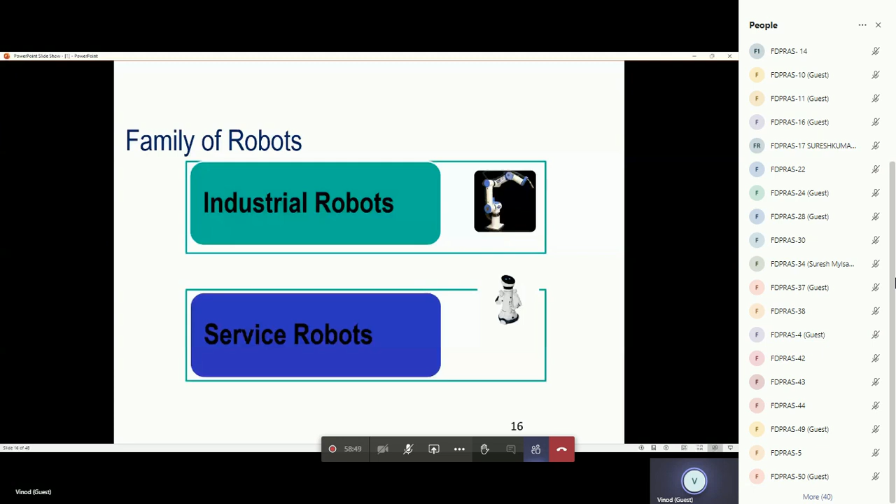And coming to the service robots, we have robots for surgery, robots for underwater applications, robots for space, robots for unmanned aerial vehicles, robots for assisting humans, robots for taking care of patients, robots for navigation, robots for entertainment, robots for teaching. So in various applications now robots have come. There were small groups, so that is why they were all clubbed together and we called them service robots.

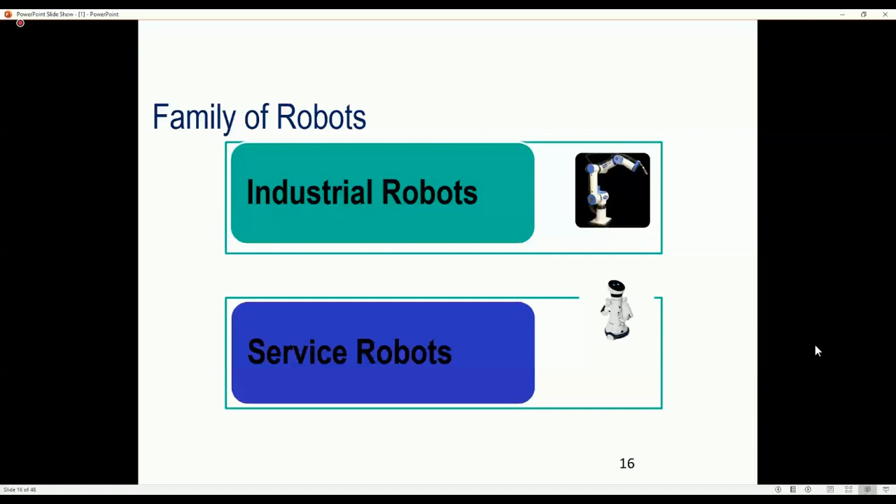Whereas industrial robots, it is more saturated right now. There are standard configurations, and all the robots fall in this group of industrial standards. But service robots are huge, from humanoids to small mobile platforms. The market as well as everything is huge. So there's a wide spectrum.

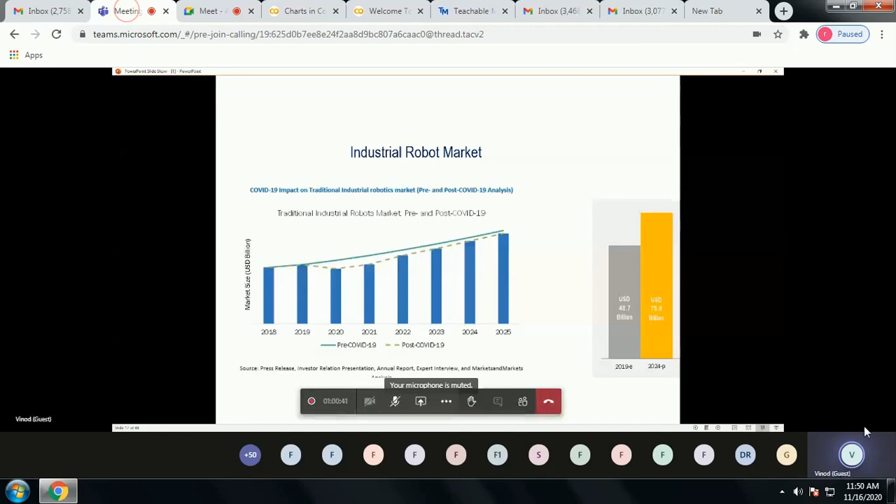And if you see the growth of industrial robots, I'm showing from 2018 to 2025 with some expected volumes. Because of COVID, there is a small dip, but apart from that, in the post-COVID scenario, the demand is going to be high. 48.7 billion US dollars was the worth of this industry in 2019. And the prediction is that by 2024, we will have about 75.6 billion US dollars. That is going to be the market for industrial robots. So that's a big market.

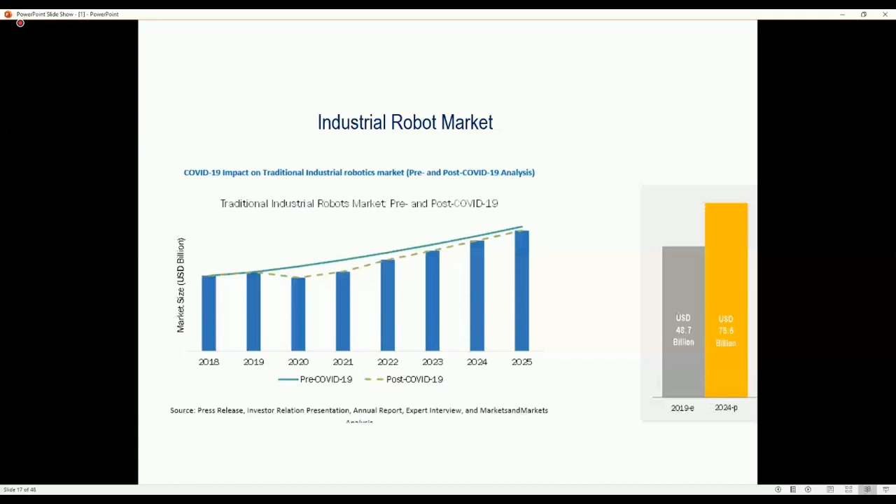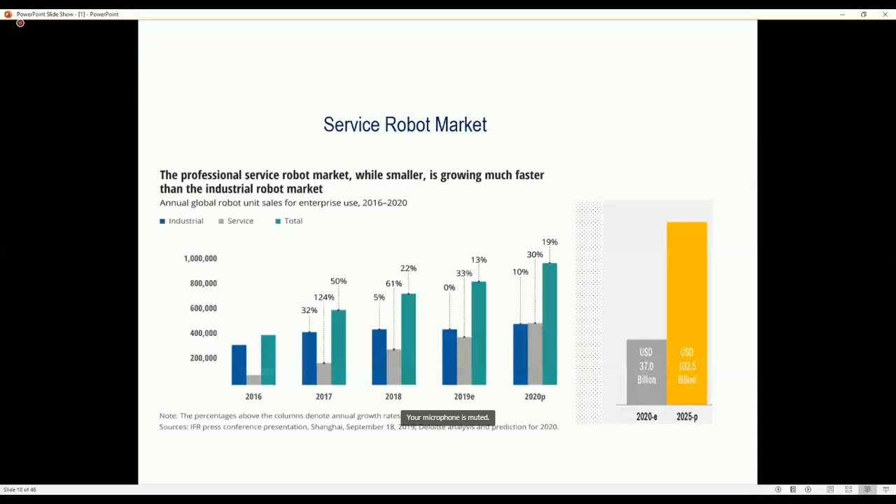Now, our topic today is about the configurations or the architecture of industrial robots. At the end of this FDP, we should have enough knowledge on various types of industrial robots, their configurations, various kinds of end effectors, how to size end effectors, how to design end effectors, how to customize end effectors, how to integrate a robot and an end effector, and also how to integrate robots into a shop floor, with some examples on programming these robots. And that is for the first week.

Second week, we will have the autonomous systems. That talks more about the service industry or service robots. So the first week will be more concentrated on industrial robots, and the second week will be more focused on service robots. And when it comes to service robots, navigation is very important, so it is mostly about mobile platforms and AMRs. We have excellent speakers for all these sessions.

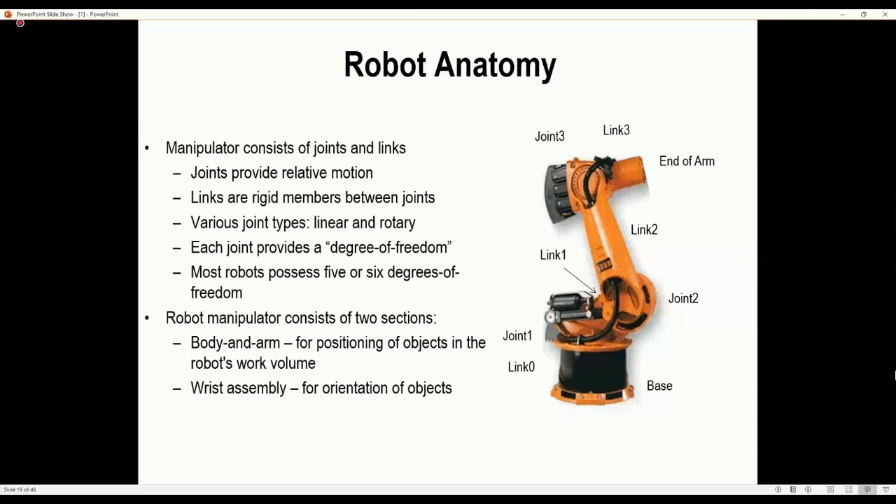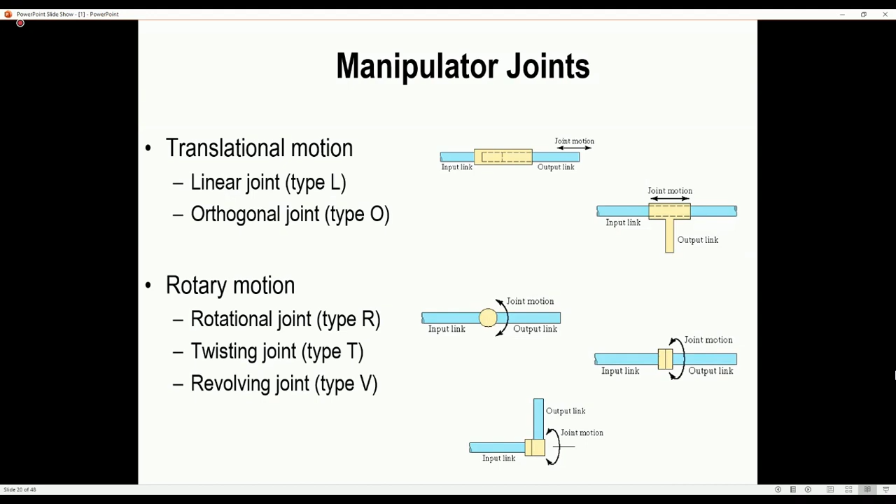So the joint notation scheme is L, O, R, T and V. Normally it separates the body and arm assembly from the wrist assembly using a colon. If there is a body and arm assembly, a colon should be used to separate or tell us that one forms a part of the body and the other forms a part of the wrist assembly.

Example TLR: T for twisting, L for linear, R for rotational. So using TLR or LORTV, you can just have a look at this picture once again. L is linear, O is orthogonal, R rotational, T twisting, and V is revolving.

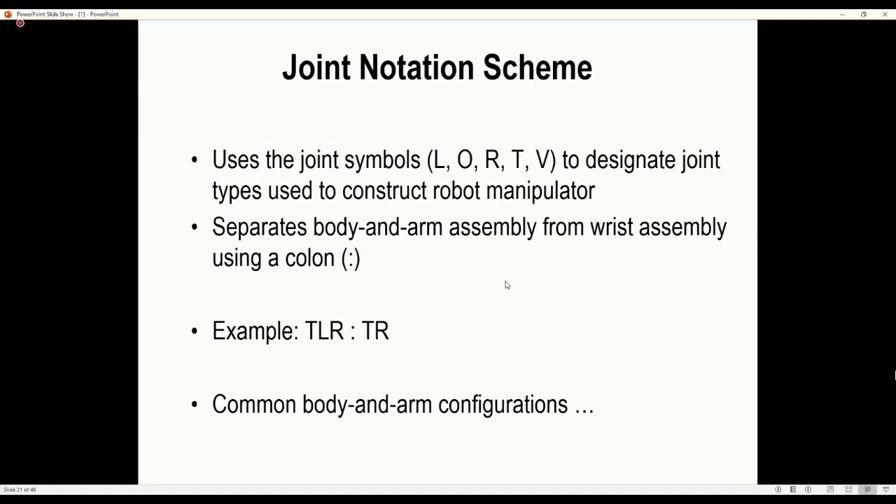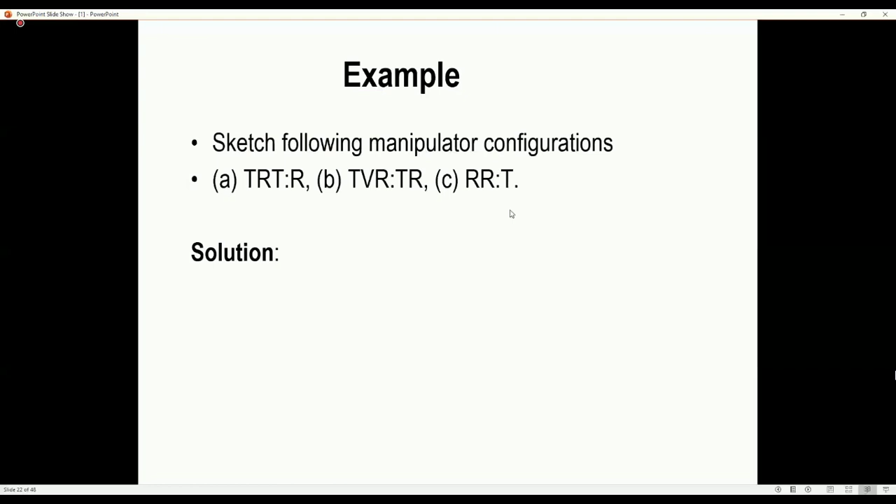So if you are asked to sketch some of the manipulator configurations, will you be able to do this? You can try this later. I'll just show the solution also. TRT:R, then TVR:TR, RR:T. So here you can see the base is fixed to the ground. On top of that there is a joint, that is twisting. So this twists on this.

Then the next joint is R, rotational. Then there is one more twist here. And the next one forms the part of the arm. So that is rotational, so that joint is represented by R. So this will be the sketch or the configuration of a robot with TRT:R.

A TVR: twisting, revolution, then rotational, then there is a twist, then there is another rotation. So that can be sketched like this. RR, there are two rotational joints, and at the end this is a twisting. So the twist forms a part of the robot wrist. So this is how any robot architecture can be represented.

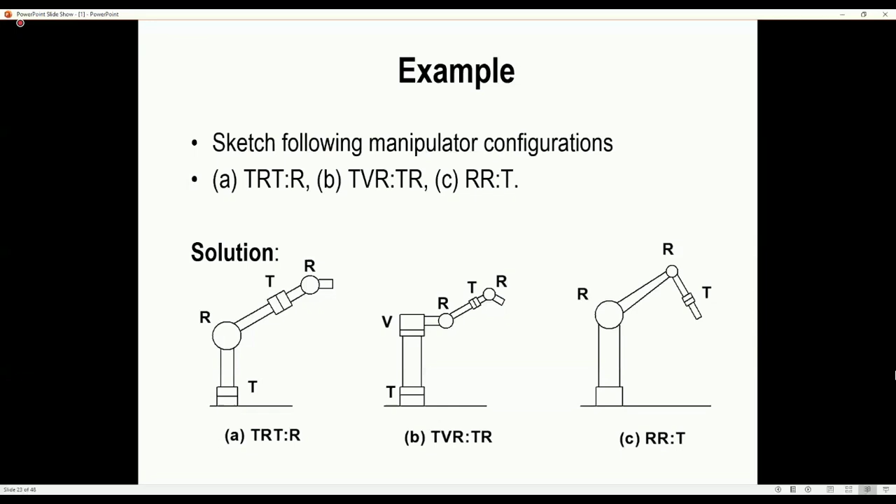So when you go into the design or when you want to understand more about industrial robots, there are some terms we have to be familiar with. What is the working envelope? Not all robots can be used for all purposes. Even if you are asked to select a robot for an application, there are various terms we have to be familiar with. Another is the positioning accuracy of the robot. So first is the work envelope or the work volume. How accurate is your robot?

Then next is the payload, how much weight it can carry. The weight here includes the end effector. So if you are going to have a gripper, the weight of the gripper plus the weight you have to lift, that is called the payload. The number of axes or joints. Then the speed of movement, that is also important.

Sometimes when choosing robots, we have seen several cases of industries making mistakes. Sometimes they may not be able to achieve the production targets because the speed doesn't match the required speed. It finally ends up in a big failure.

Then based on the motion control, it can be path control or velocity control. Then what kind of drive the robot uses? It can be hydraulically driven, or electrically powered, or a pure pneumatic robot. So all versions are available in the industry.

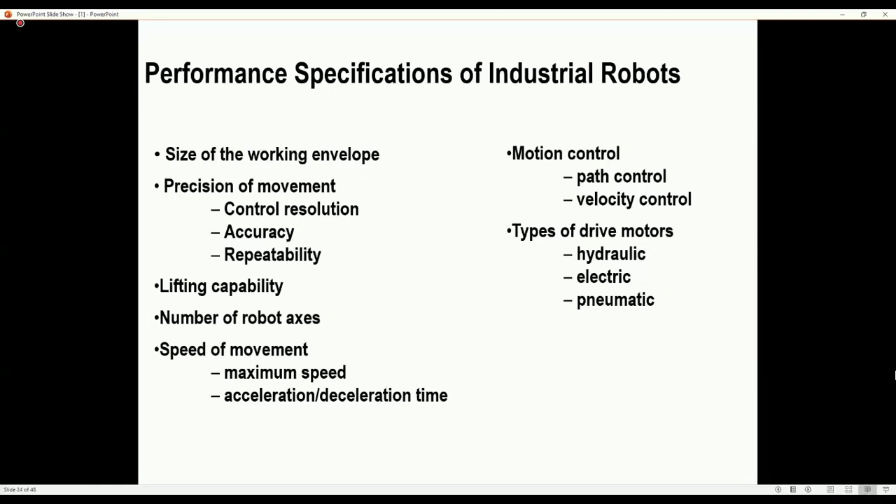And here the work volume, you can see a picture that shows what we mean by work volume. Normal industrial robots are fixed either to the ground or on a table or closer to a machine. So with the base fixed, how much can the robot reach? The spatial region within which the end of the robot's wrist can be manipulated is called the work volume or the workspace. This is determined by the physical configuration of the robot.

There are 6 physical configurations. We will see that in detail. The size, the number of axes, robot mounting position, limits of arm and joints. And then at the end, we are also fitting an end effector. So how long is the end effector? How is the reach of the end effector? That also has an effect on the work volume of the industrial robot.

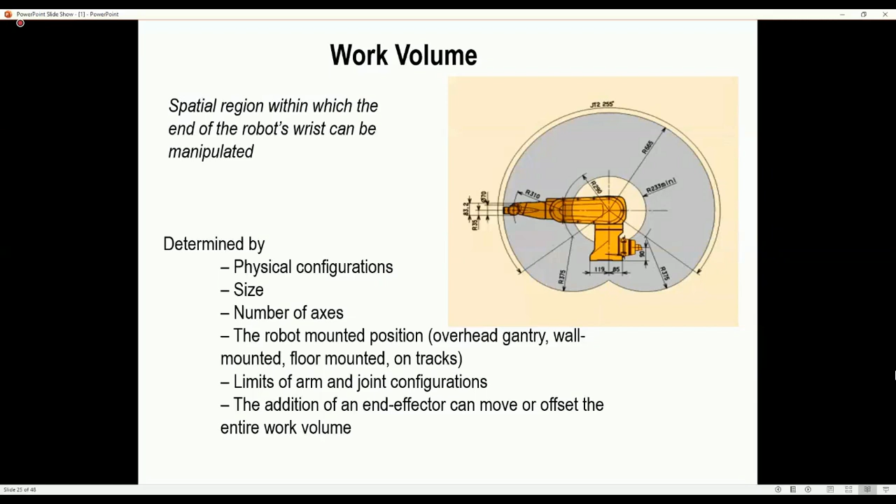Another term is the spatial resolution. So that is the smallest increment of motion at the wrist end that can be controlled by the robot. So this depends upon various factors, like you have a control system to control the positioning accuracy. We use a lot of feedback systems, so the accuracy of the feedback systems, also the mechanical accuracy of the joints, the drives. So all these contribute to the spatial resolution of an industrial robot.

So if you see here, there is a target point. So the accuracy is how far the deviation is from the possible position to the target point, and maybe the second time you can see the adjacent position, another possible position. So the resolution is the smallest increment. Once you give a command, where it will go and stop. Let us say we want to move it by 1 micron.

That is the requirement. When you give a command of 1 micron, the robot is supposed to move 1 micron over in 3-dimensional space, but it need not, because there are no robots with 1 micron resolution or accuracy. Let us say the robot's positioning accuracy is 25 microns. Even within 25 microns, let us say we give a command of 10 microns, it may not go exactly, because its accuracy is 25 microns, so it can be plus 25 or minus 25. So the resolution here is within the 50 micron range.

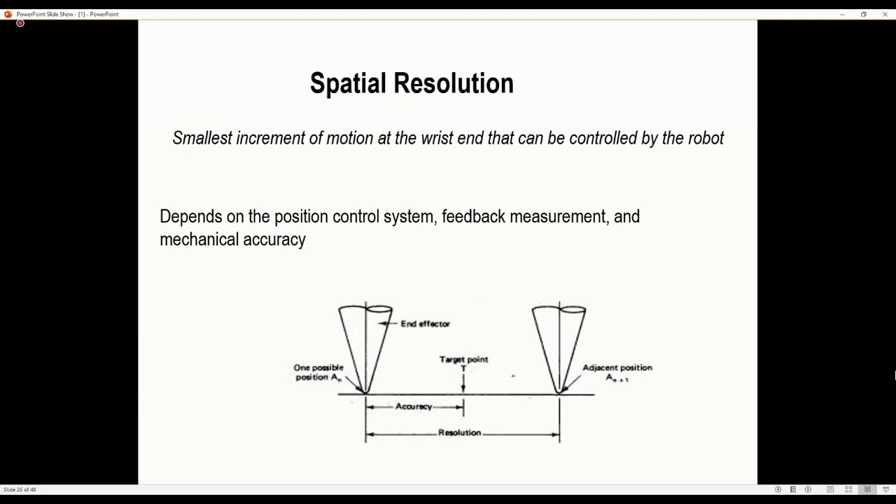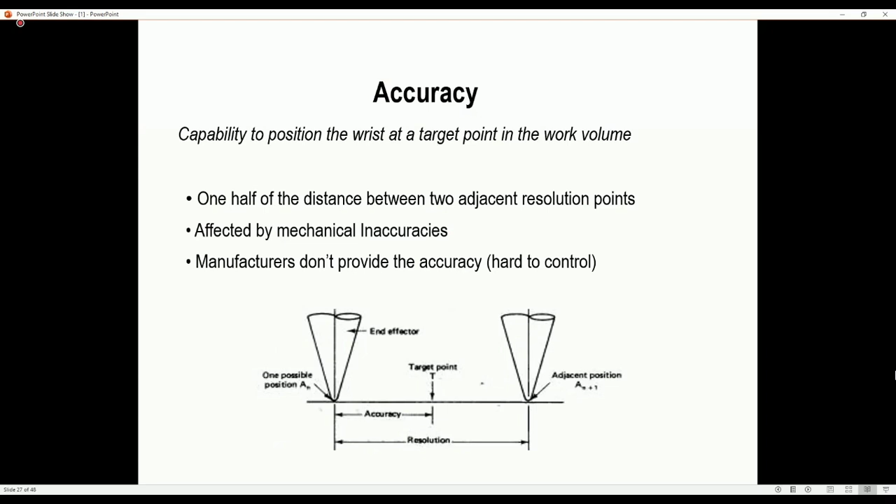And the accuracy is the capability to position the wrist at a target point in the work volume. So that we have seen, that is the accuracy by which, within the spatial resolution of the robot, how accurately we can position the end effector. So that is called the accuracy of the robot.

Another very important term is the repeatability, because the robot may have accuracy but need not be repeatable every time. So when you operate it 100 times, if the robot end effector positions at different points during these 100 iterations, then its repeatability is very poor. So robots are supposed to give very good repeatability, because in most cases we are using them for repetitive tasks. So if repeatability is not there for a repetitive task, that particular robot may not be a good choice.

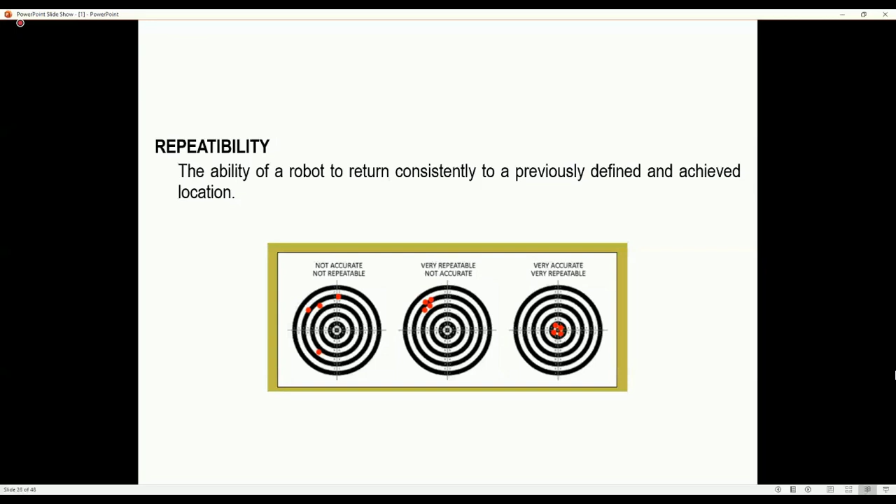So here in the first picture, it is not accurate, it is not repeatable, because you can see the 4 points are spread across. In the second one, repeatability is there because all points are closer, but it is far away from our actual desired or required point. So accuracy is less, but repeatability is good. In the third case, it is accurate. At the same time, repeatability is also good, because all the 4 spots are within its accuracy range. So this is another term which you can find in most of the data sheets of any industrial robot.

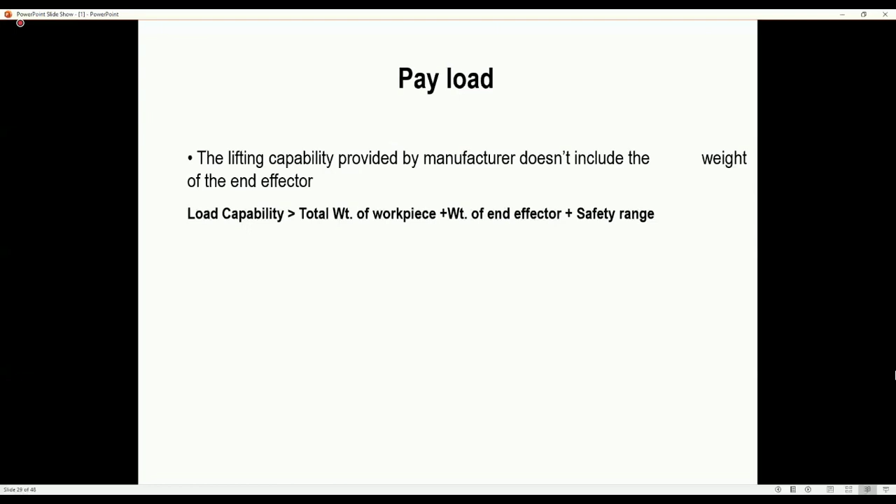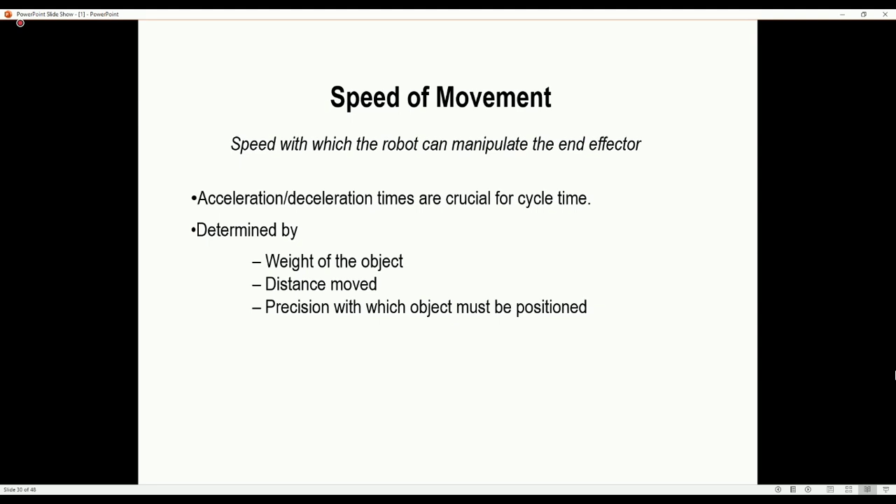And payload, that is the lifting capability provided by the manufacturer, that includes the total workpiece weight plus the weight of the end effector, and we also provide a safety range, normally 80%. Then speed of movement, I think we have to speed up. How fast we have to move the manipulators, because sometimes the accuracy may be good, the repeatability may be good, but the robot inherently may be slow. So when you deploy such robots for some fast action like pick and place or packing, the productivity will come down. Motion control, there are path control type and velocity control type.

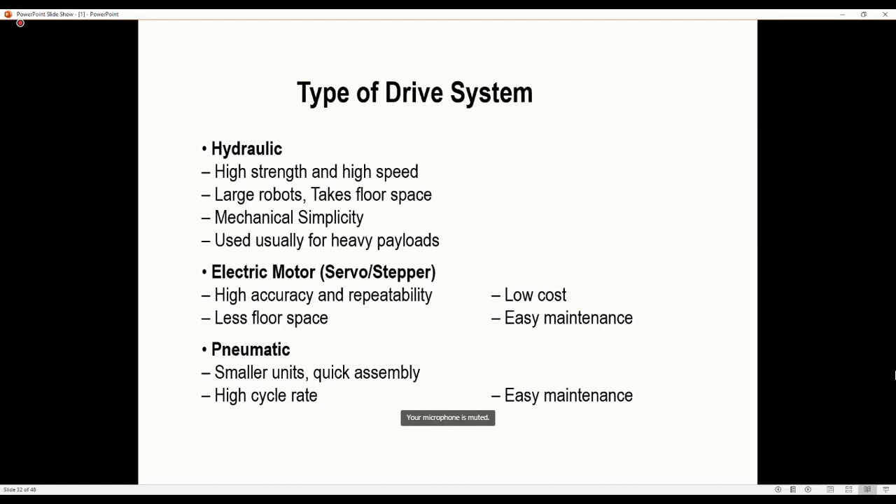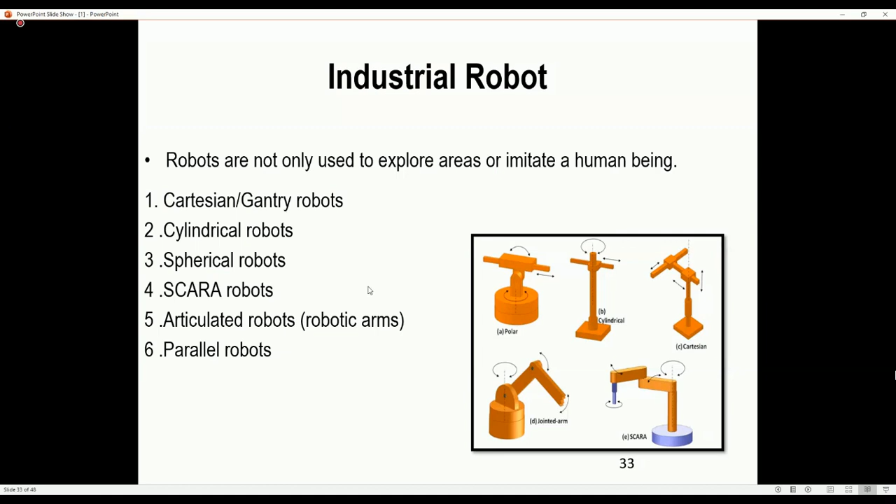Then drive systems, we discussed this, whether it is electric, pneumatic or hydraulic. And now coming to the various configurations. There are only 6 proven industrial configurations in the market or in industry. First is the Cartesian or gantry robot. Then cylindrical, spherical, SCARA, articulated, and parallel robots.

SCARA, the notation is VRO - V is revolving, R is rotational, O is orthogonal. That is the configuration of a SCARA.

Selective Compliance Assembly Robot Arm - that is the expansion. Similar to jointed arm robot, except that vertical axes are used for shoulder and elbow joints to be compliant in horizontal direction for vertical insertion tasks.

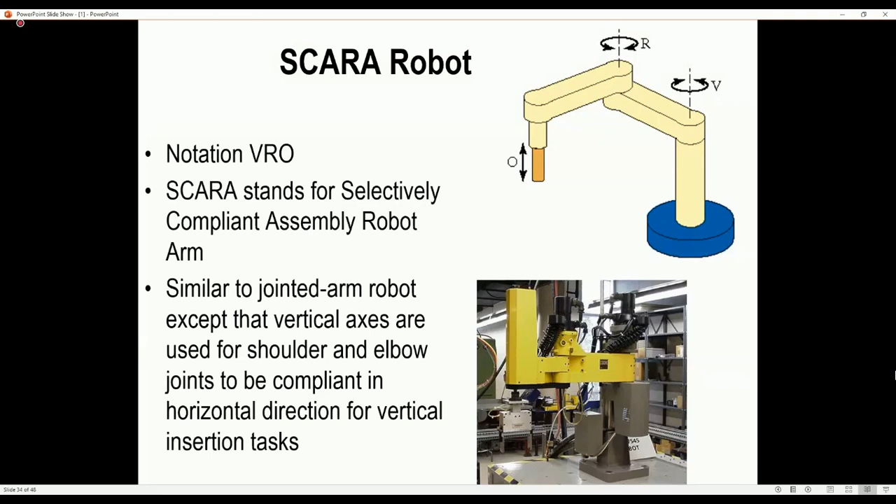SCARA robots have a repeatability of less than 0.025 mm. It's good. Number of axes normally comes with 4 degrees of freedom. Vertical motions are smoother, quicker, precise, because it normally holds the job vertically. Good vertical rigidity, high compliance in the horizontal plane.

Working envelope is less than 1000 mm with a payload that goes even up to 100 kg, and it is very fast - it goes up to 5 meters per second.

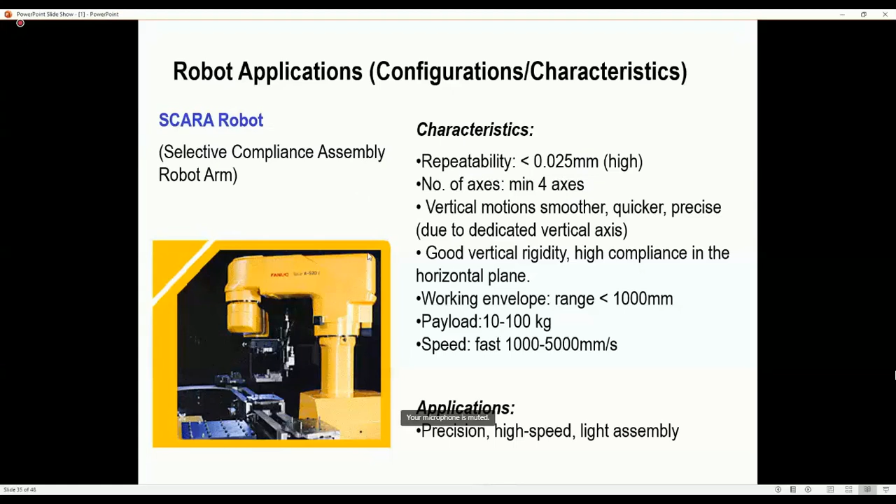Applications are wherever you want precision pick and place, high speed applications like sorting of connector pins, assembly of lights, LEDs. In such applications, SCARA finds a lot of applications in the industry.

Cylindrical is TLO configuration - there is a twist, a linear, and one orthogonal. This consists of a vertical column relative to which an arm assembly is moved up or down. The arm can be moved in or out relative to the column.

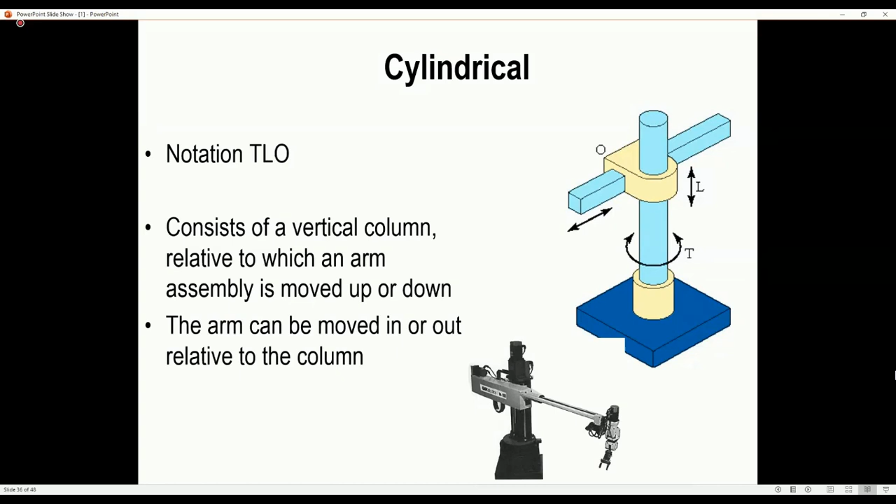A lot of these are used in industry with a repeatability of 0.1 to 0.5 mm, minimum 3 axes. Mostly it comes with 2 linear and 1 twisting joint.

Working envelope is typically large. It has a payload of up to 250 kg, better than SCARA, and the speed is about 1000 mm per second - so speed is not as high as SCARA.

But it is simple. Some of the small robots are used for precision assembly and large robots for material handling, machine loading and unloading.

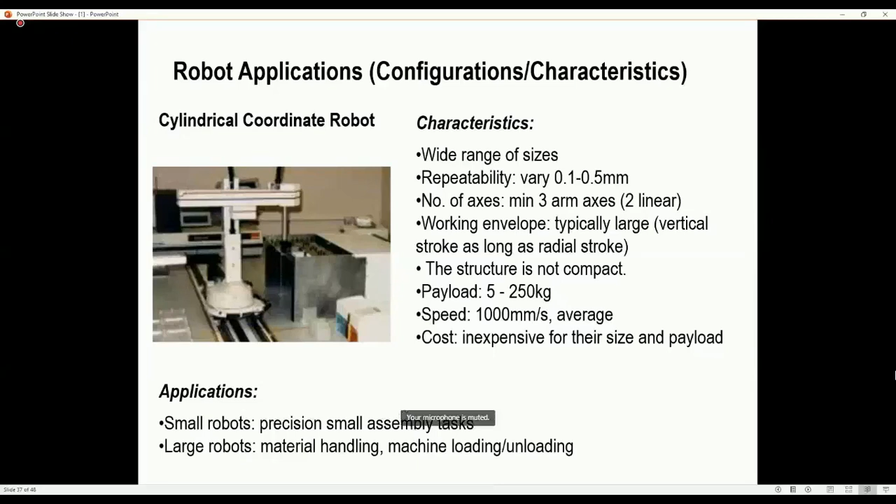Jointed arm is also called articulated. This is the most popular type of robot in the industry. It is used in most applications.

Applications include welding, painting, sealing, deburring, material handling, machine tending, inspection. This is one of the most popular kinds of robots in the industry.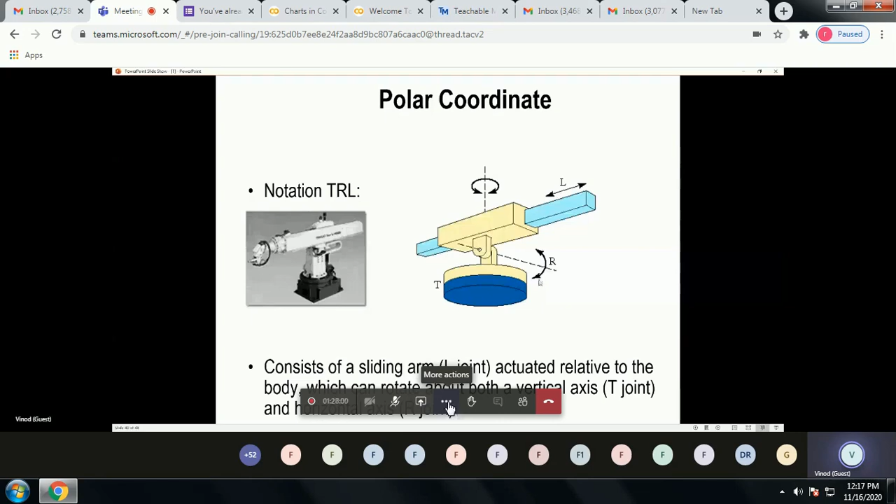TRL consists of 1 twist, 1 linear, and 1 rotational. Repeatability in this case is poor. Minimum 3 axes or degrees of freedom.

It has a large work volume, but payload is not as high as articulated robots, and it is comparatively low speed.

Maybe you would have seen the Unimate picture, if you remember - that is almost a spherical coordinate robot. But since we have articulated robots with more features and more flexibility available, spherical robots are not that popular in industries now.

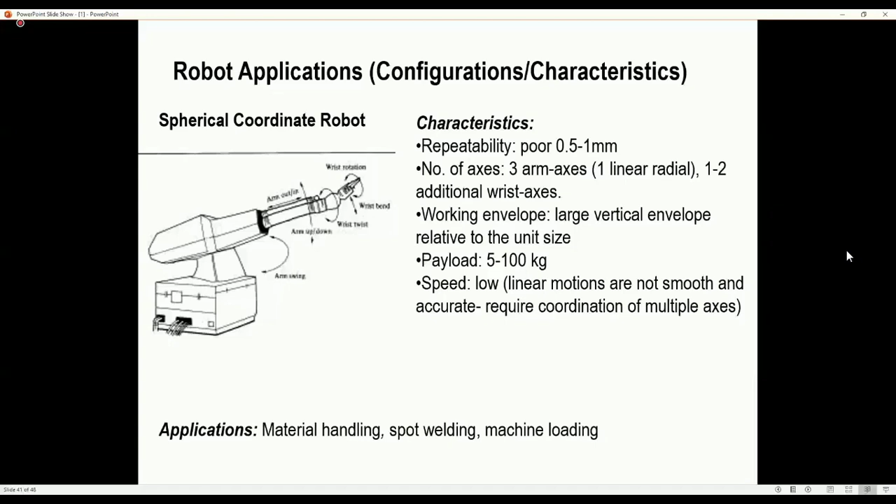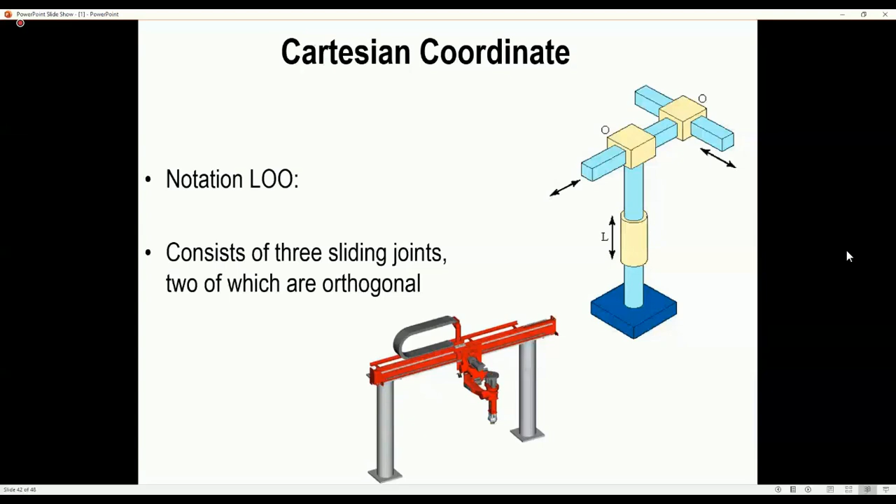Cartesian is one linear and two orthogonal joints, consisting of 3 sliding joints. It is like a gantry, so it can be used for inspection, precise assembly, arc welding, material handling.

Its repeatability is high. It is fast. When we go for a gantry combination, it can also take much more load.

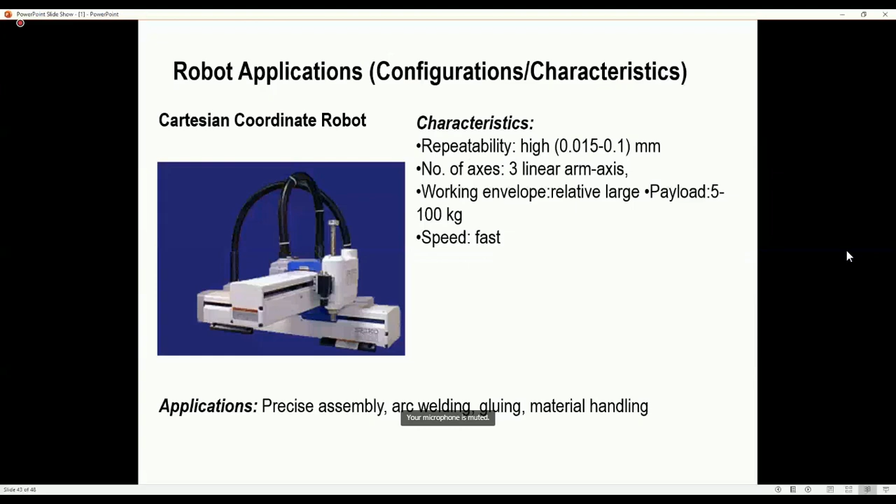When used in industry for heavy lifting of heavy components, material movement over long distances, gantry type robots are used. In fact, a lot of CNC machines use gantry type robots for loading and unloading.

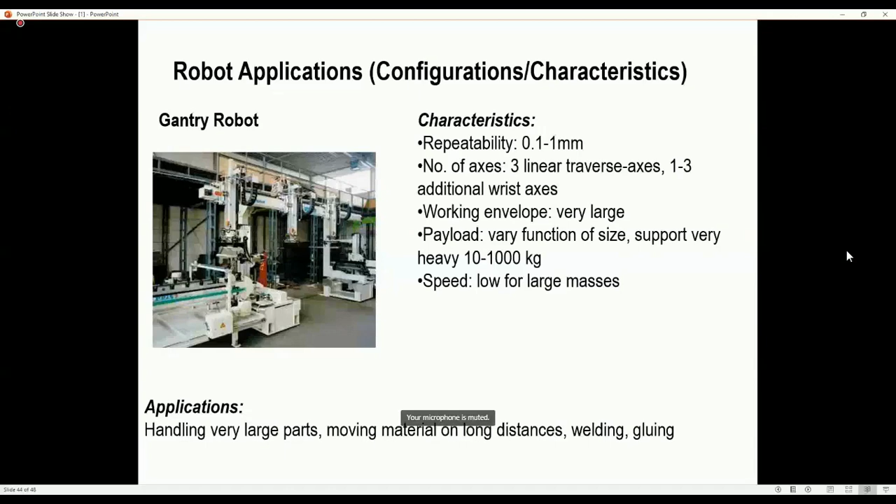The last one is the parallel kinematic type. This is how it will look like - you can see the work volume here. These are really fast, but mostly for pick and place or packing, like packing of chocolates or sorting of components.

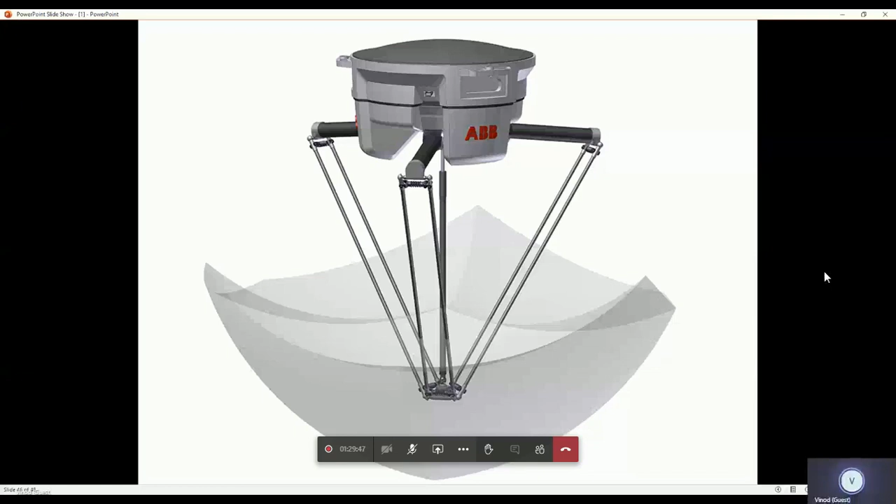When it comes to the basics of these robotic elements, we have seen the configuration and the mechanical structure made of links and joints, and various combinations possible. The links and joints can be linear, orthogonal, rotational, revolute, or twisting. All these combinations form the mechanical structure.

Now to control this, we need more systems. Every robot comes with a robot controller, and all these degrees of freedom or axes are controlled by electric motors, hydraulic solenoids, pneumatic cylinders, or hydraulic cylinders. So some kind of actuator is required, and to actuate the actuator we need a power source.

If it is an electrical actuator, the commonly used ones are stepper motors or servo motors. Stepper motors normally work on open loop, so they are not that accurate. If you want precision in robotics, and you are planning for electric actuators, it's better to go for servo motors. Servo motors require a closed loop system.

There is a servo drive to amplify the servo voltage, and there is feedback that goes back to the servo drive telling about the position and velocity of the servo motor. Feedback from the drive is also fed back to the controller, so the robot controller knows precisely where the robot has positioned.

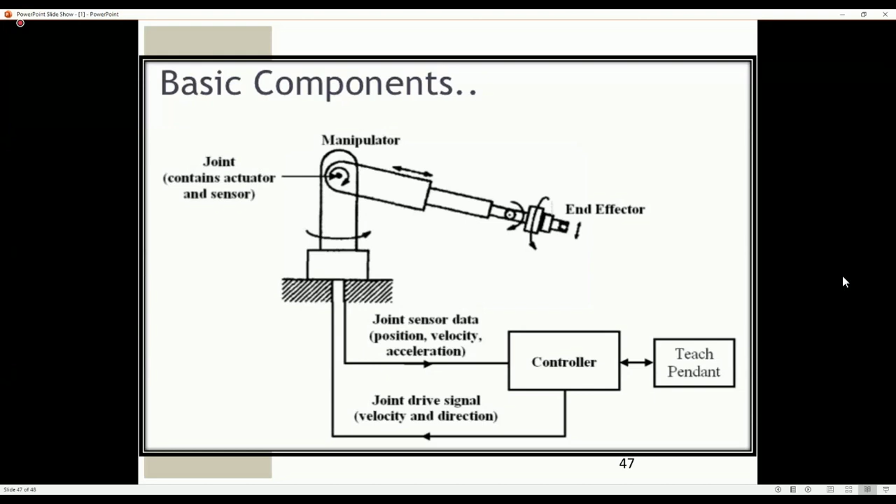So this is an overall introduction about the various industrial robots and its architecture. If you have some questions, you can post it now or ask it now. With that, we will wind up.

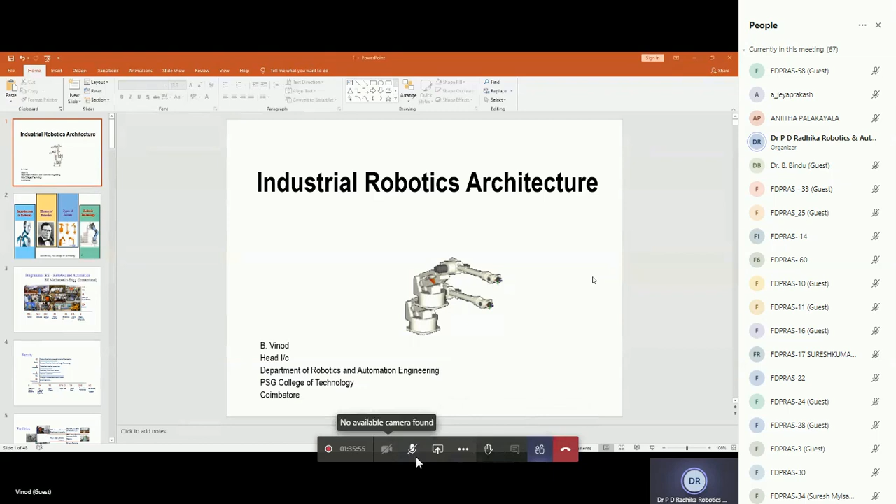And suggestions also. We are all teachers. I am sure some of you will be teaching robotics.